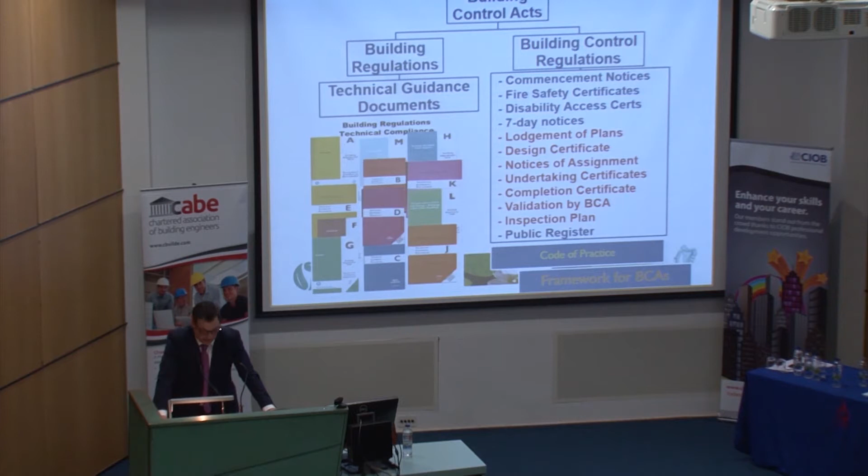Second speaker struck me in my job as a GMIT lecturer. I attend many seminars, presentations, CPD events, etc. during the year. For the past year, one of the worst I attended and also one of the very best I attended had the building regulations in common.

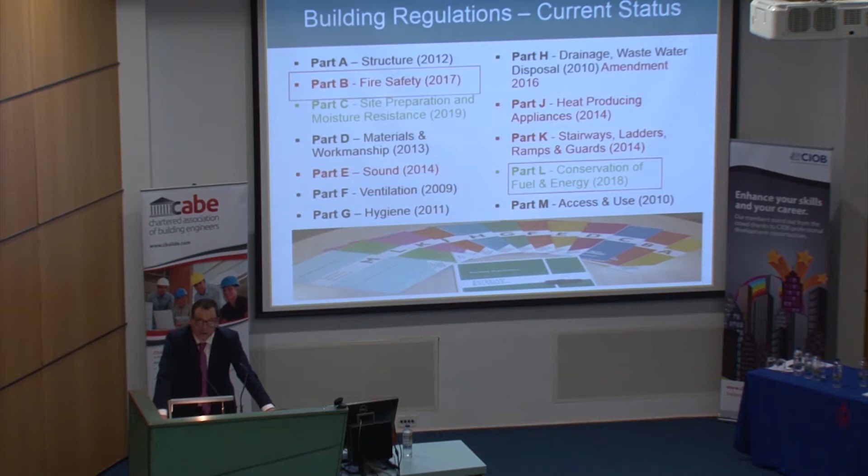So you'd be very pleased to know that the very best one was presented by Eamonn Smyth, who's our next speaker. Eamonn is advisor to the Department of Housing, Planning and Local Government in the area of building regulations, building standards and control. He's worked extensively over the years in the development of the technical guidance documents that we all use, and development of standards for both radon remediation and inspection protocol for legacy septic tank issues following the intervention by the European Court of Justice. Eamonn is a Galway man, St Jarlath's, and then on to NUIG, where he graduated as a civil engineer, and he'll update us today on recent and near future changes to the building regulations.

Back for some reason. Okay, good afternoon. I think we are just about afternoon. As you said, my name is Eamonn Smyth. I'm a civil engineer, work with building standards.

Today, I put up 'what next', because most people go, what next are they going to come up with for the building standards? And I'm going to do a very quick run through of what we're at and where we're going. Any of you that have heard me speak before know I can do an hour on any one of the building regulations, so to try and cover four different sections of it is going to be a pretty rapid overview.

So let's go. Building Control Act is where the power comes from. That gives the Minister the power to do the building control regulations and the building regulations. Building control regulations, as I said, you're all sick to death of them - BCAR, lodgement of plans, design certifiers and whatever. That's all in place. It's been in place since 2014 and it is having an effect, absolutely. People are now looking - whereas before they signed certs, now they're statutory certs - they're actually liable, and they're now being very cautious about what they sign.

Behind that, what's happening, we have the BCMS system, the Building Control Management System. And at the front end of that, we're now in the process where we're talking about innovative technology and whatever. We're working to be able to put both fire safety certs and DAC applications online in that system. Behind the system, we're introducing a risk analysis. So when you fill out the form and you say you're a multi-story building, or a timber frame multi-story building, or something else like that, it flags it up as a higher risk than other buildings, and then the inspections by the Building Control Authority will be done on a risk basis. That's where we're going with that.

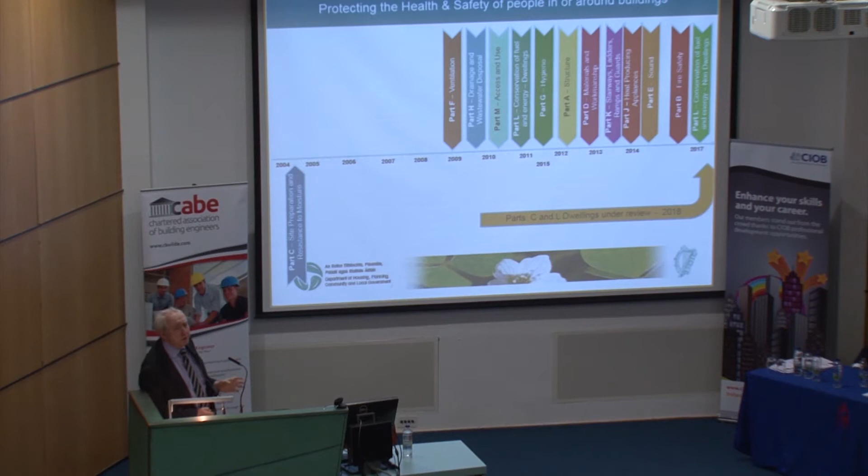The building control officers themselves will actually have handheld app systems where they can download any of the forms you've actually put in online when putting it in for validation. At your commencement notice stage, it will also be able to handle all of the plans and all of that. Oh, I must have been clicking on things.

Right, on the other side, we have the building regulations. That's really what I'm talking about today. One of the points I would make is that achieving all on the right-hand side under building control gets you no place. The whole purpose of them is so that the building regulations are complied with, to make a building safe for people in and about buildings. That's the aim, if you like. That's the mission of the building regulations - the health and safety of people in and about buildings. That's what they're there for.

There are controls in place so that we might achieve that. There was a delegation over from Norway recently, and when I asked them, do they have a robust system like that? No, they don't. Do they have a problem with compliance?

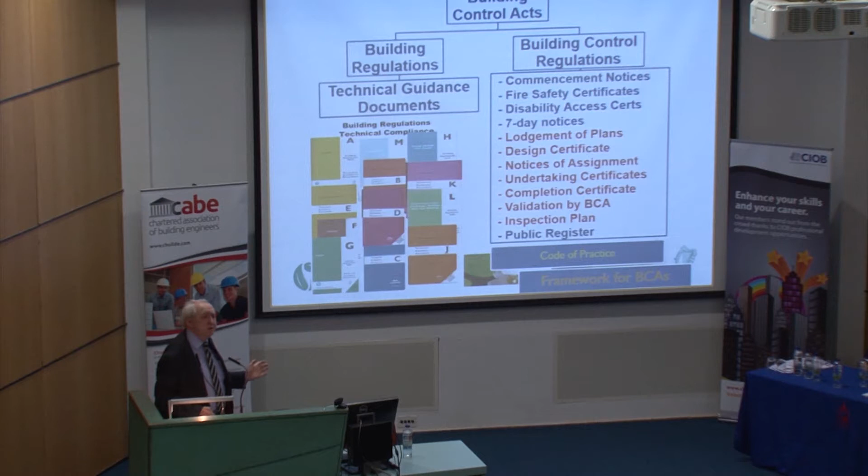No, they don't. When they introduce a regulation, the builders, designers and everything take it all on board. We haven't achieved that yet.

If you haven't been in the game since the downturn, you'll see we've done a hell of a lot of work, good or bad. You can decide on that yourselves. But basically, that's where we've gone with all of those.

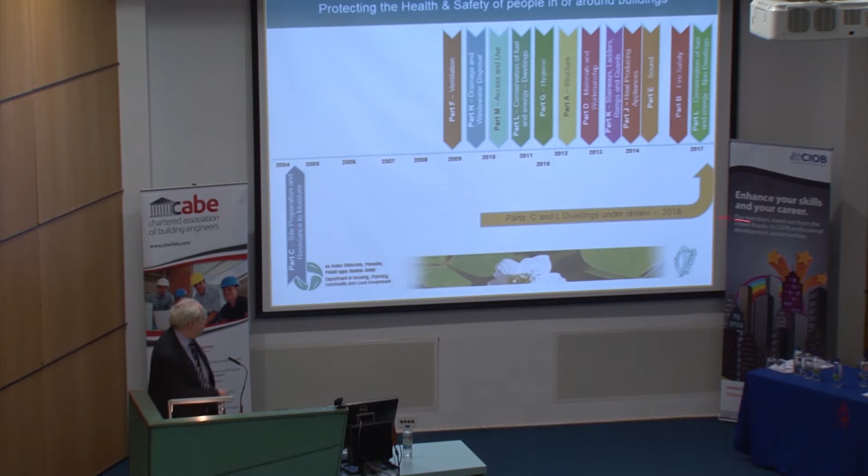Where we are, I don't know whether I can point with this thing. Poor old Part C is back there. We're trying to do it. I started it back in 2014 and got sidetracked into Fire and Part L, mainly Fire, and so we're still trying to work on Part C.

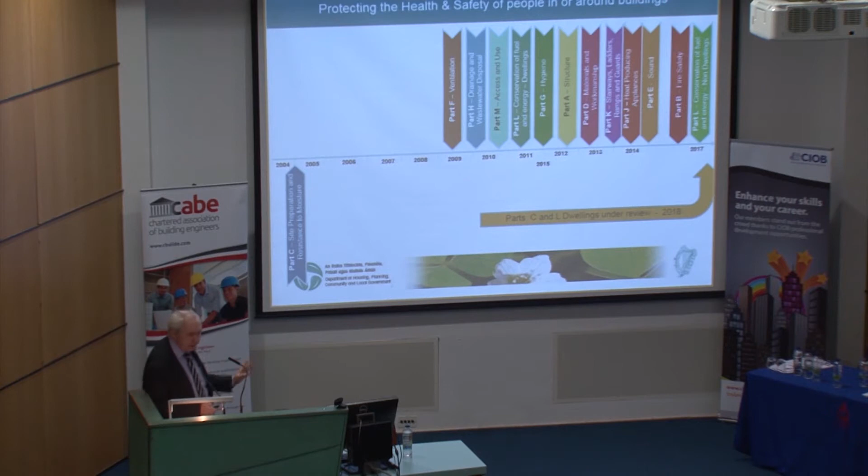From that point of view, we are starting work under the pyrite report and indeed the blocks report. It's recommended that Part C comes out. Part C SR21 for a hardcore was revised because of the issue we had with pyrite.

I keep pressing that by mistake. So what I'm going to talk about today is B and L. They're the ones on the cards that are being done substantially. And as I say, Part C, we have initiated some work on it.

We're looking at maps, wind maps, wind-driven rain, spell maps, highest and lowest temperatures affecting on steel and stuff like that.

The other bit is that Part C is becoming a very serious document because we're looking at renders as well, monocouche renders, single coat renders, external insulation. The whole ball game has changed. If you go back and look at the document right now, all you have is a mention of cavity walls. But now we have single leaf systems with external insulation.

My SEAI colleague mentioned it - they're doing it in retrofit, and also in new builds. But you have to have a situation where it's robust enough for the Donegal coast when the winds are lashing in off the sea.

This is where we're developing the wind maps and whether they're appropriate in certain areas, whether certain types of construction - on the other side of that, rain screen. You saw the issue in Grenfell, the rain screen went up like a candle. That's another issue we're looking at from the Part C point of view, and from the Part B point of view.

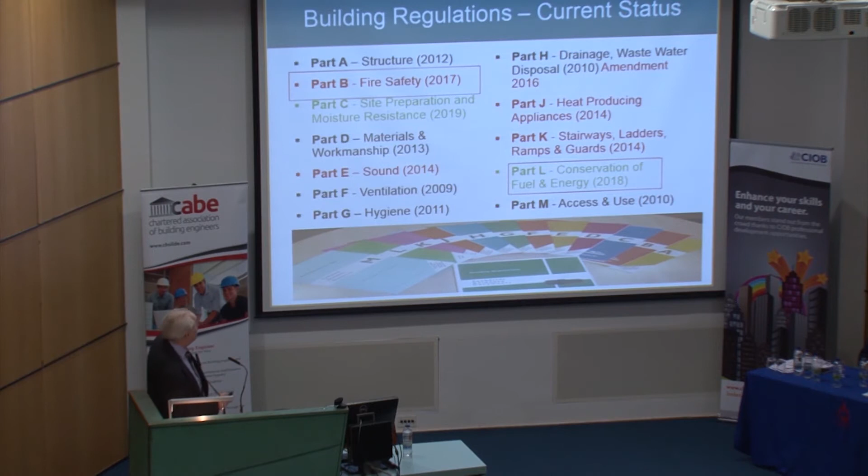Okay, so Part B. What? Oops, this is like a gun. So basically, Part B started in 2012.

We went out for what we call a pre-revision consultation. We got 44 submissions, actually over 1,000 comments. We also set up a working group of stakeholders to actually review the comments and come up with recommendations. What did they come up with?

They came up with the idea of having 2 volumes - one for dwelling houses, which made it more simple to understand how you complied and got safety in dwelling houses. It's interesting to know the statistics show that 80% of fatalities in fires are actually in dwelling houses. We're inclined to think of multi-story buildings, apartment blocks, but no - 80% happen in actually dwelling houses.

So the document Dwelling Houses, Volume 2 as we now call it, is specific for dwelling houses, and then the other one covers buildings other than dwelling houses. The dwelling houses document came out and was published in 2017, and is applicable from the 1st of July 2017. This is the legislation.

What did we do? Well, we changed just a tiny bit, and I'll explain that in a second. Normally when we do a regulation, we take out the previous legislation and drop in the new one in the second schedule of the building regulations 1997. We didn't do that this time because we wanted the legislation to stay in place for buildings other than dwelling houses. So we dropped in B6 to B11.

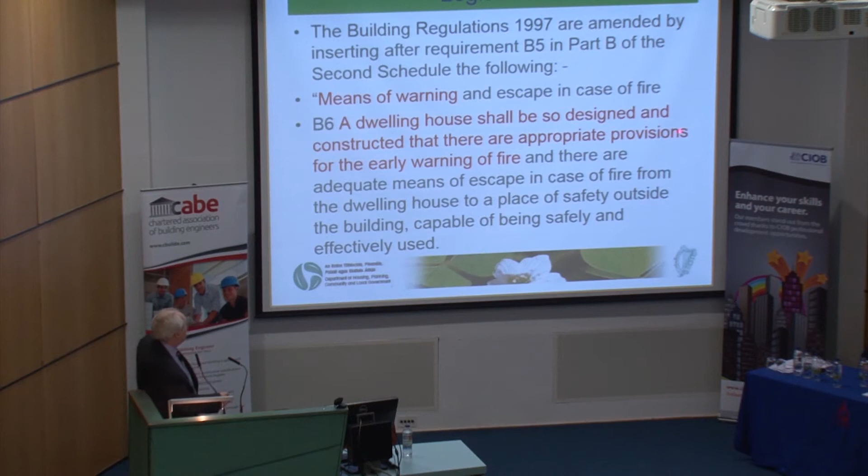I put that in specifically because there was a legal argument that you could say you've provided an adequate escape route, with the lads sitting on the stairs. We don't design for that - that's supposed to be a clear way so that in the event of fire everyone gets out and isn't tripping over you and your bags on the floor. That's the actual point. So by putting in that stairs, you could say, well, I've provided the escape route.

We wanted this, and there was an extrapolation within the TGD, but it wasn't in legislation. Now it is in legislation - you must have an escape.

The other thing is dwelling house - that was just a new definition. A dwelling house is a dwelling that is not a flat, because dwelling and flat are already defined in legislation.

The TGD, as I said, comes in on the 1st of July. All dwelling houses started after that date must comply with the regulations. There's no planning exemption. I had questions.

What about if I've started? If you've started the dwelling, then the building regulations that existed before the 1st of July apply. If you start the dwelling after the 1st of July, then the new regulations apply.

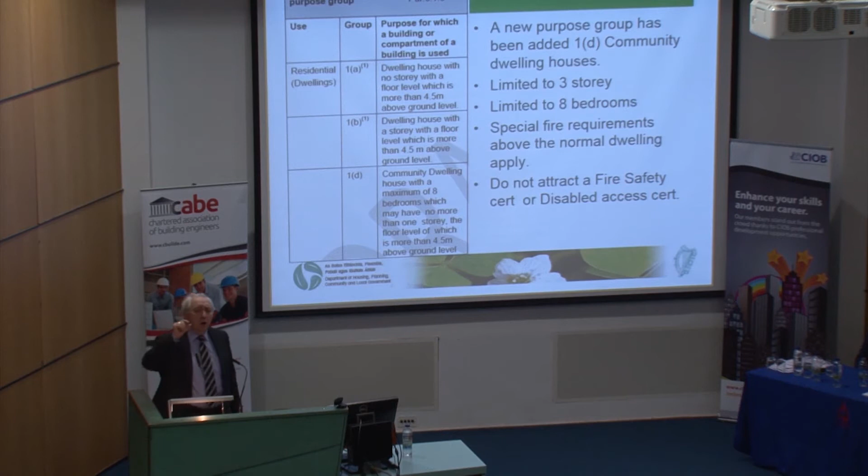Does that mean you could have different requirements on the same estate? Absolutely. You could have one side of the estate with alarms just in the living room, kitchen, and corridors, and in the rest of the houses you also had to have them in the bedrooms, because under a High Court decision in 2003, the building regulations that apply are those in force when the work started.

Okay? Did I jump one there? Okay.

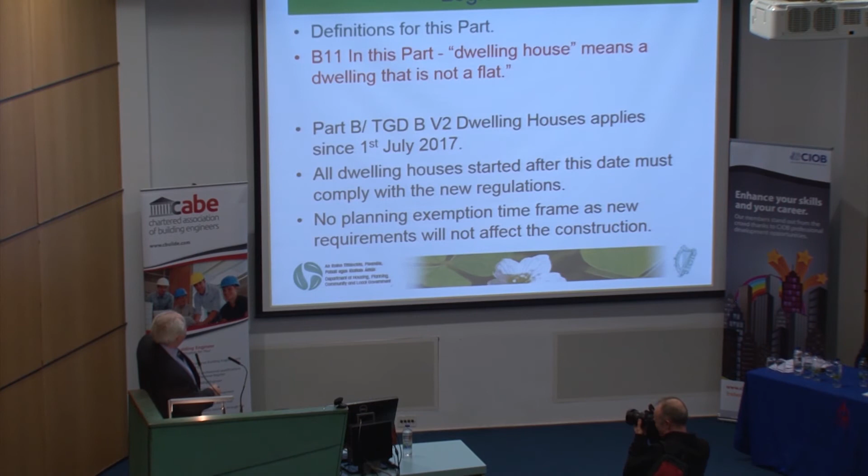So what are the changes in the TGD itself rather than in the legislation? Remember, the TGD provides prima facie compliance that you've complied with the legislation, but the legislation is what you technically and legally have to comply with.

The biggest change we've made is a new purpose group, 1D, which is community dwelling houses. We were asked to do this by the HSE and some charitable organisations, because under the strategy for decongregation of institutional buildings to communities, they were moving people out into community-style dwellings, but were obliged to meet the requirement of Purpose Group 2A, which was seen as excessive and was costing a fortune.

What we've designed is that you can move them out into what's known as a community dwelling, as long as you meet certain criteria. In that instance, we've reduced the standard, but there are assumptions in that - so we have a higher level than a dwelling, but lower than a Purpose Group 2A.

But it only applies in certain circumstances - only 3 storeys, only 8 bedrooms. And they don't attract a fire safety cert or a disabled access cert.

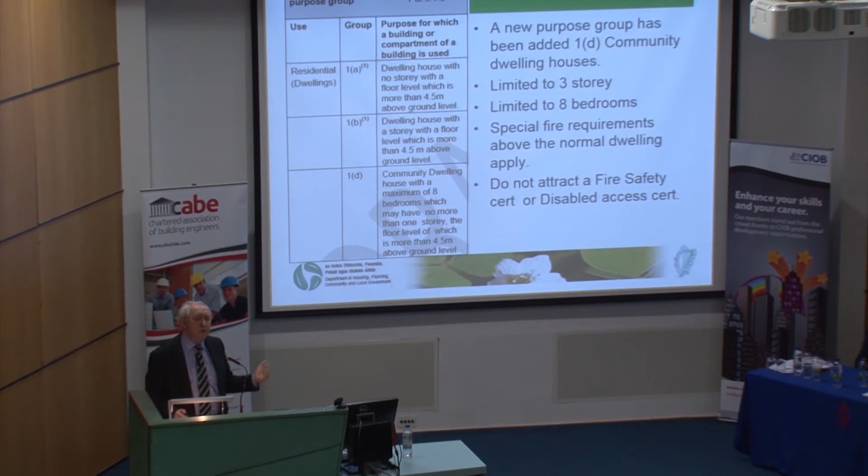There was a calculation done. If you take an existing house and change it to the community dwelling standard, it will cost about 40,000. To change it into a Purpose Group 2A, it will cost 140,000.

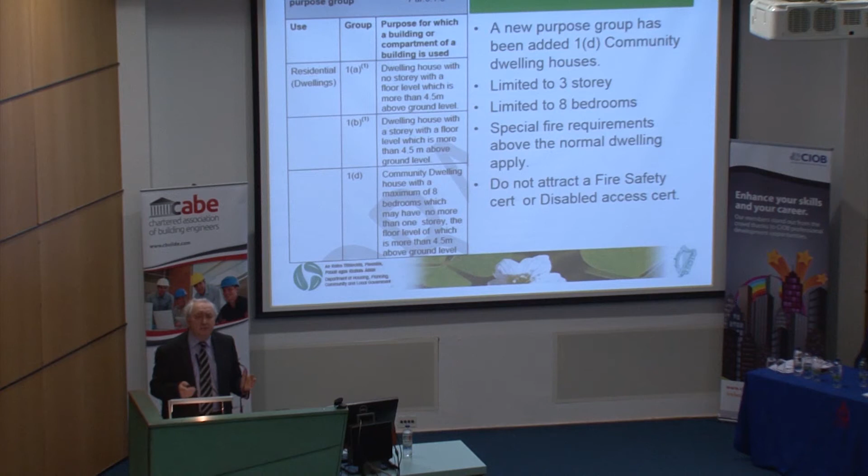My own personal view is that for charitable organisations, or any organisation building them - the HSE - if you're building new, I'd go for Purpose Group 2A so you can accommodate all categories of people with disabilities. If you're converting one, I'd go for a community dwelling and limit its uses.

So there's your community dwelling house - that's what you're defining it as.

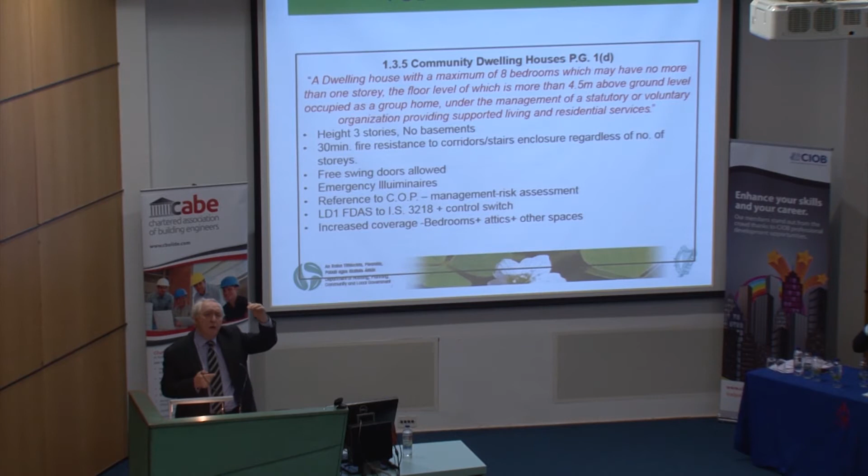What have we done? As I said, 3 storeys, 30-minute fire resistance to all, doesn't matter about the height. In a normal house, full half-hour fire resistance only occurs at 3 storeys - before that it's nominal half hour, full in a storey.

In these houses, it doesn't matter if it's a bungalow - we still want a full protected corridor so that you have time to escape because of the disabilities you may have. We're hopping all over the place.

Also, it's an LD1 system - an LD1 Fire Detection and Alarm System to IS 3218. It also has a control switch which tells you where you can silence the rest, and tells you where the actual fire will be. We have alarms in all the bedrooms and the other attic spaces. That's what an LD1 system gives you.

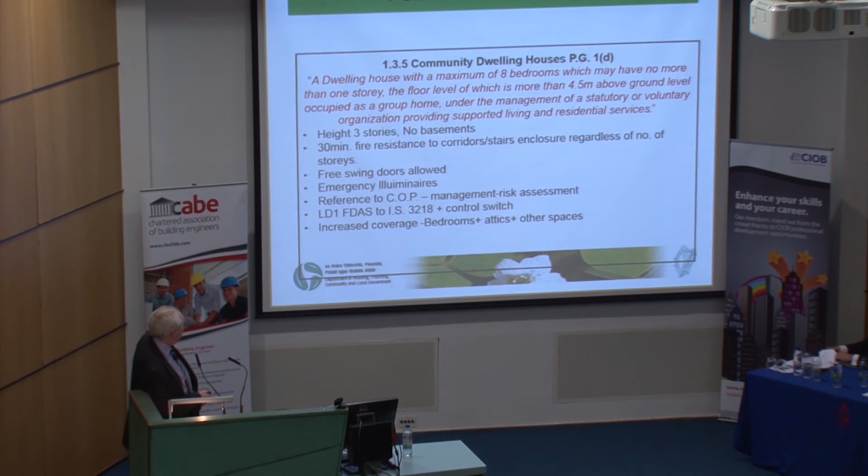We introduced, through the fire services, a Fire Safety in Community Dwelling Houses document - a colleague and myself wrote it for these.

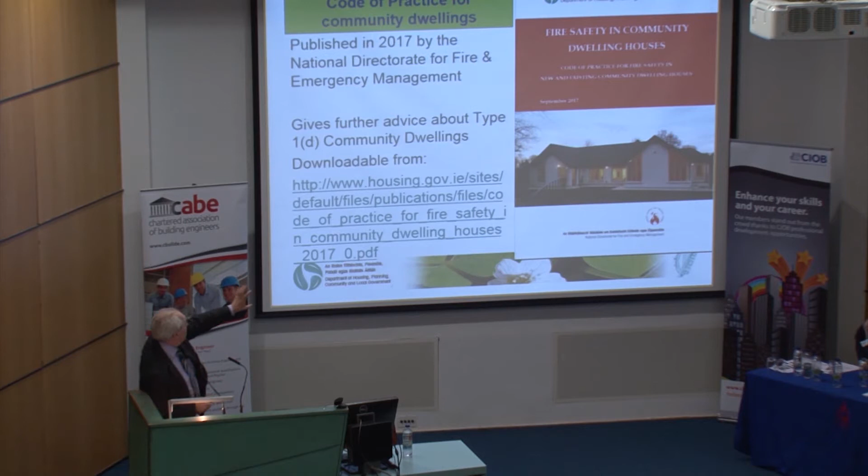This not just goes through the fabric elements which are in the TGD, but also the management element and the assessments that are required. That applies not just to new build, which building regulations would apply to, but also to houses that are now being used as community dwelling houses. That's an important document, you can download it from there as well.

Back to the main changes to the TGD. Main changes: fire detection alarm system, the LD2 system - I call it the Paddy LD2 system. I'm not particularly happy with it, because if any of you are across the border, you'll understand that an LD2 system in the UK is now different to an LD2 system in Ireland.

It would have been nicer if they put it as an advanced LD2 system. Our LD2 system requires you not only to have it in all the areas we previously had, but it also requires you to have it in all the bedrooms, as well as all the other risk areas. That's our LD2 system - you need to be careful. You have contractors that come across from the border working in the south, and they say you have to do it to an LD2 system, and they do it to the UK LD2 system, which is non-compliant. In that sense, I don't like it.

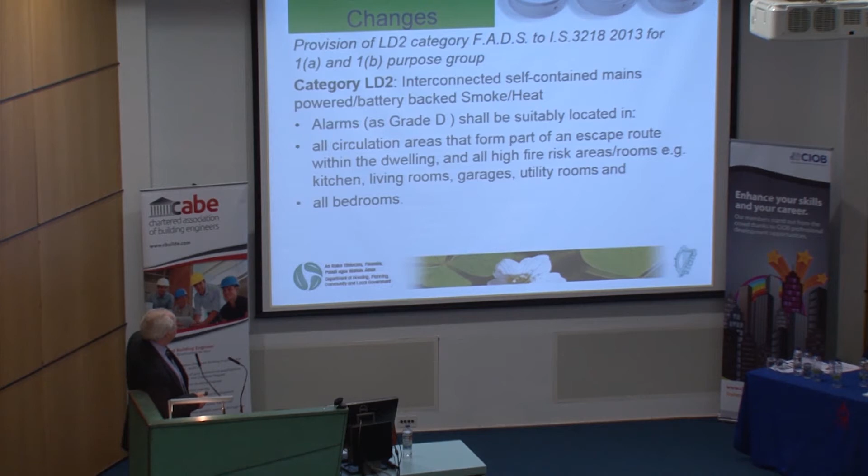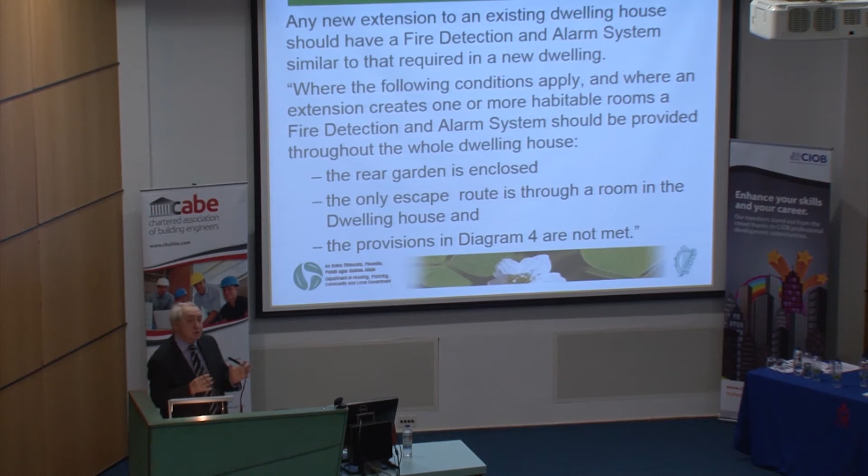Also, new extensions - if you're doing a new extension, you put in an alarm system. But there's also a scenario where you may have to put it in the existing house. Normally, the building regulations do not require, except for change of use, works in an existing building unless you're doing a material alteration, and then it's only to the works you are doing. In this scenario, if you're caught - I'll show it to you for a second, here. So you put on an extension at the back, and you have an enclosed garden out the back, which would happen a lot in cities where the garage was developed beside it, and you have no way out on the side, and you're surrounded on both sides and at the back with another housing estate.

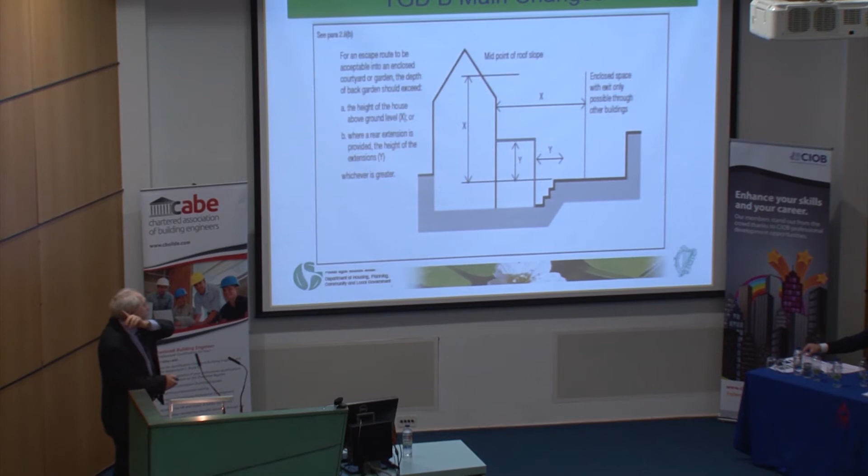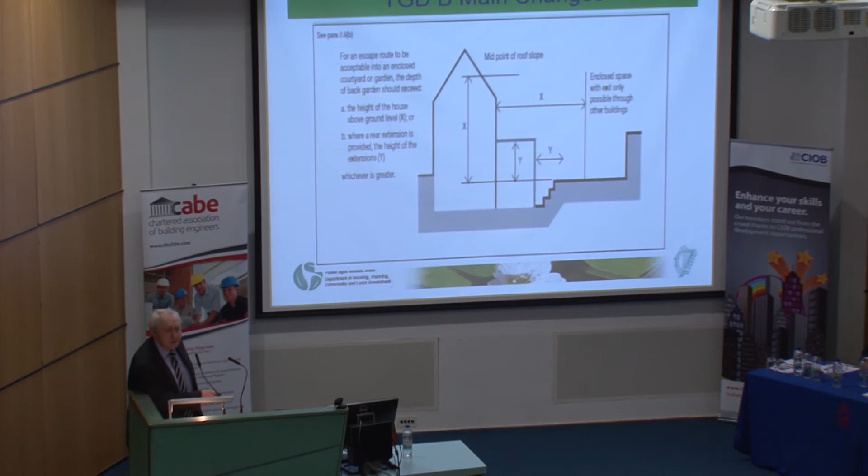Other change: in the current 2006 document, we say when you're replacing windows, it is recommended. We've changed that now for dwellings. If you're putting new windows in a dwelling, you should meet, as far as is practical. We've put that in because we're not asking you to break bigger holes in the wall than exist, but you should try to meet the actual escape requirements. In a normal house, in anything built in the last 50 years, you will be able to meet the fire requirements for an alternative means of escape. In the case of all other rooms, you shouldn't make it any worse.

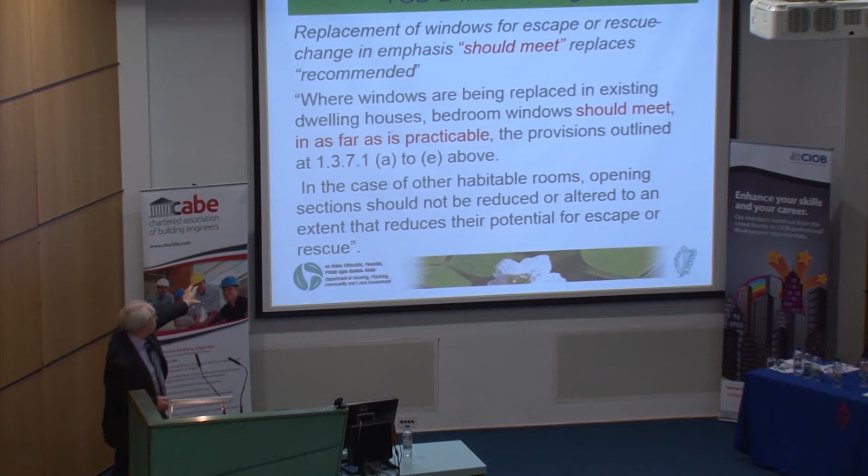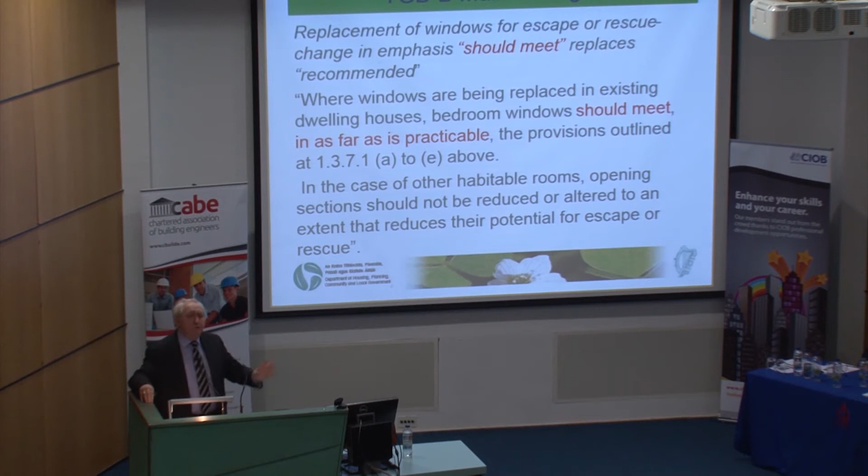That's always a rule in the building regulations - it says you can do no new or greater conflict to the building regulations. So if you have a building that doesn't comply, you can't make it worse. If it does comply, you can't then create a non-compliance by works you do. That's there in the Primary Act - you can't do that.

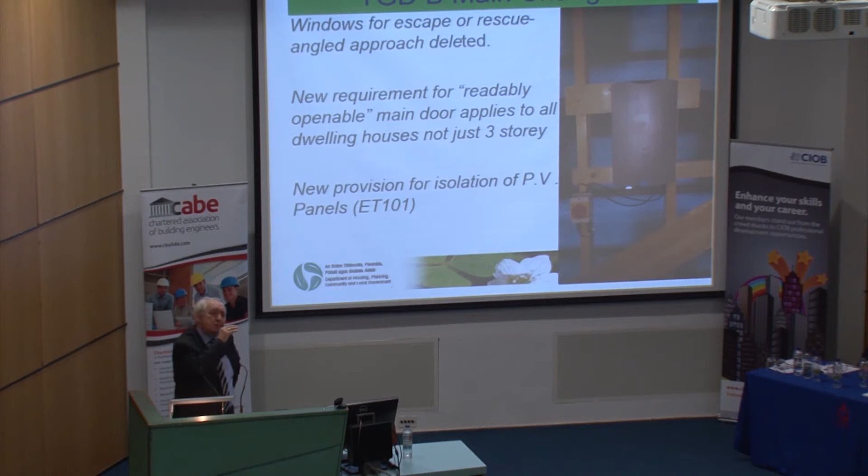Readily openable - I had a question here, actually came in from some building control during the week, yesterday actually. The readily openable requirement applies to the primary route. The primary route for escape is up there and out there. In a house, it's along the corridor. If you're in a bungalow, it's along the corridor and out the front door. If you're in a 2-story or 3-story, it's down the stairs and out the front door. So that door must be readily openable now.

It used to always apply in a 3-story building anyway because you had a protected corridor. It wasn't much sense to have a protected corridor and getting down to the bottom and discovering that the keys are where the fire is. You must have a readily openable lock. Now it's applying to all dwellings - readily openable primary. You don't have to have it on the patio door or on the back door.

That was the question I was asked. No, it doesn't apply to them, except if you had a patio door acting as an escape route for an inner room scenario, or in a 2-story house where the patio led out onto your balcony where you were looking over the River Corrib, for example, and that was acting as your alternative means of escape - then you'd actually have to have that readily openable as well.

But otherwise, no. The other thing is we require PV provisions on isolation of the PV - that's the PV arrays. That's the big thing at the moment for renewables, is PV. That's fine, but in the event of fire, you have to have a situation that isolates the actual DC side.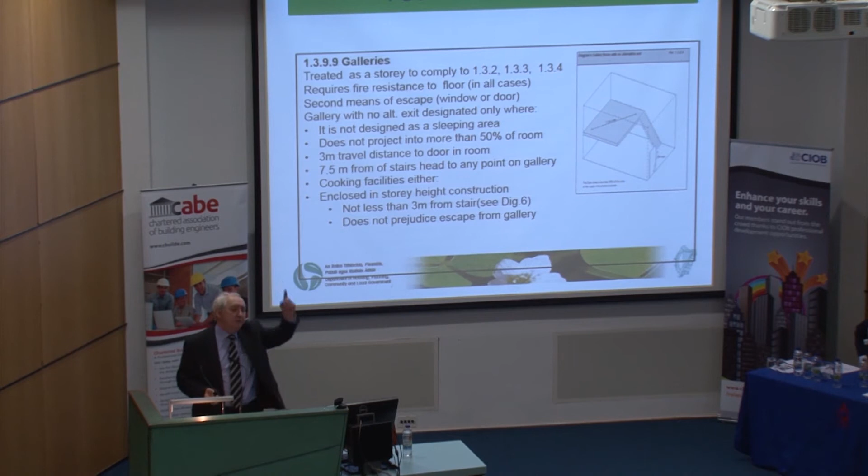So imagine you have a fire, fireman goes in. Their automatic thing is they pull the main fuse on the outside, the AC side, and that kills everything inside, so he's feeling very safe - except your inverter is down in the utility, and it's got a 20-foot line above in the attic that's all still live from your PV on the roof. When he pulls at the ceiling to try and pull the fire, he connects that and gives himself a very, shall we say, sparkle in his eyes, to say the least. You're talking about maybe 800 volts you'll actually get off that.

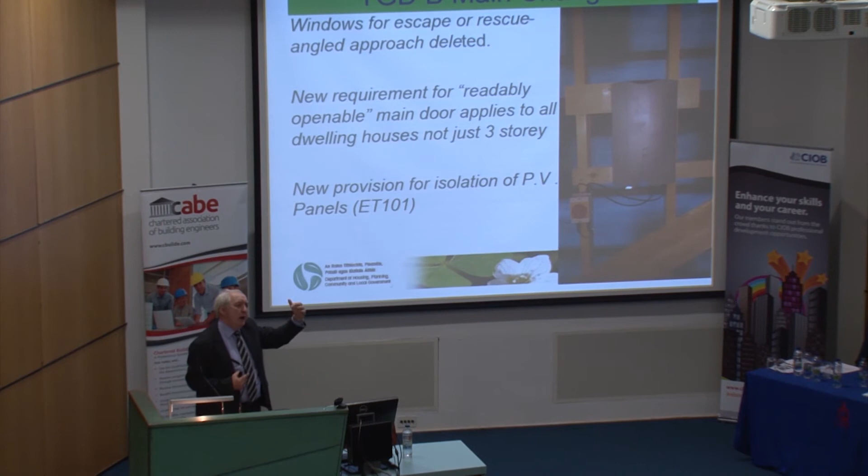So it is smarting a lad up, to say the least. So there are other ways of complying with this - we've come up with what one might call a more practical solution. There's a fire safety switch you can use, so that when he pulls the fuse outside, it has a 15-second delay but automatically kills it as it comes in. So you'll be bringing your PV array line, your DC line, in through the fireman switch and then down to your inverter.

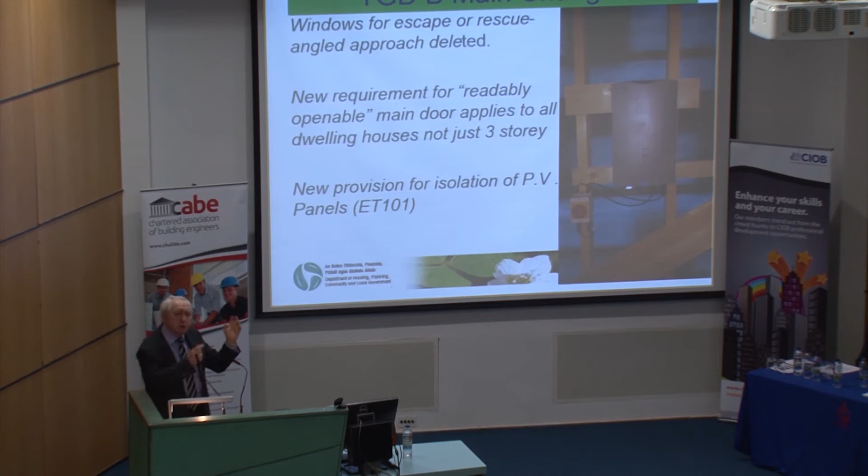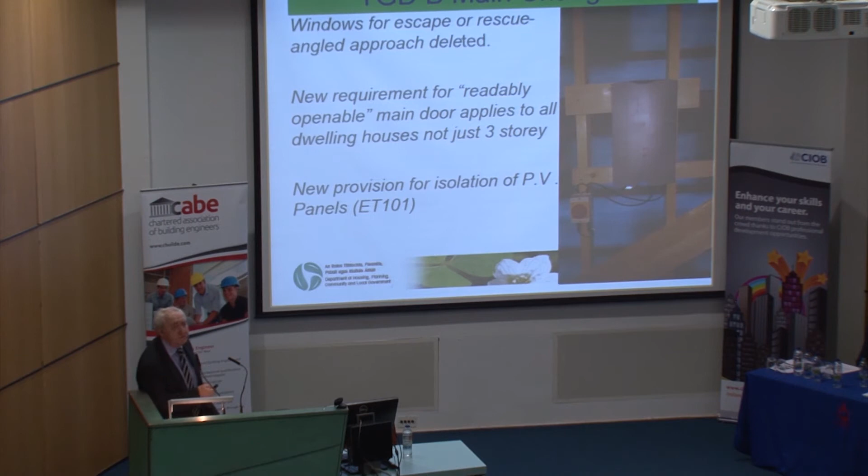The other option is put the inverter up where it should be and leave less than a meter from there in. That's a picture there. We had some consultation with some consultants, and they made up a mock-up out in a house I went to in Dublin, and you can do it that way - so when you bring the PV array into the building, you shorten the length of what is going to be DC live. So when you pull the fuse outside, it kills it as far as the inverter, and therefore you only have a very short piece of wire, so it doesn't present the risk it should. So you've eliminated the risk.

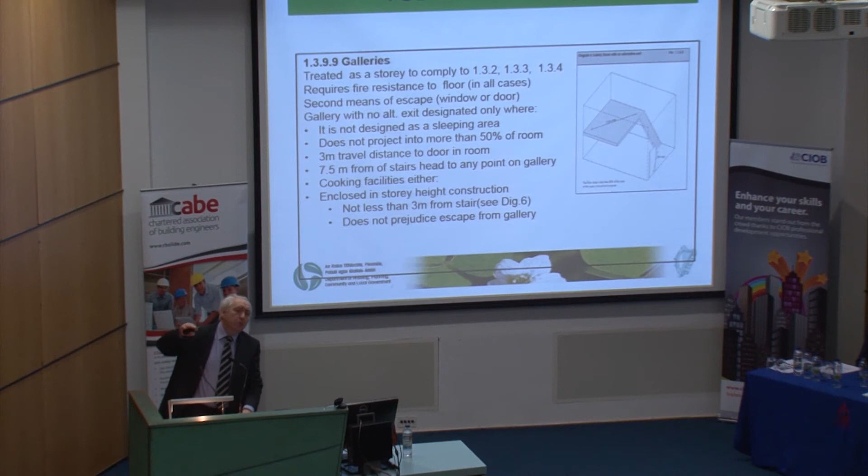Other thing that we have is galleries. A gallery is another story, just to be clear. A gallery is another story in which you must comply with the requirements of 132, 133, or 134 - so that's 1 story, or 2 story, 3 story, or whatever.

Except where - this is the exception, but it's the exception as long as you meet these requirements: not greater than 50% of the room, 3 meters from the stairs out to the door, 7.5 meters across there, and it can't be a sleeping area. So you can sit up there and have your drinks and tut at the world, or look over the lovely vista across the River Corrib, but you can't be sleeping up there - be comatose after a few drinks. You can't do that, because then you won't know to get out, and you'll have the fire underneath, and we'll have another fatality.

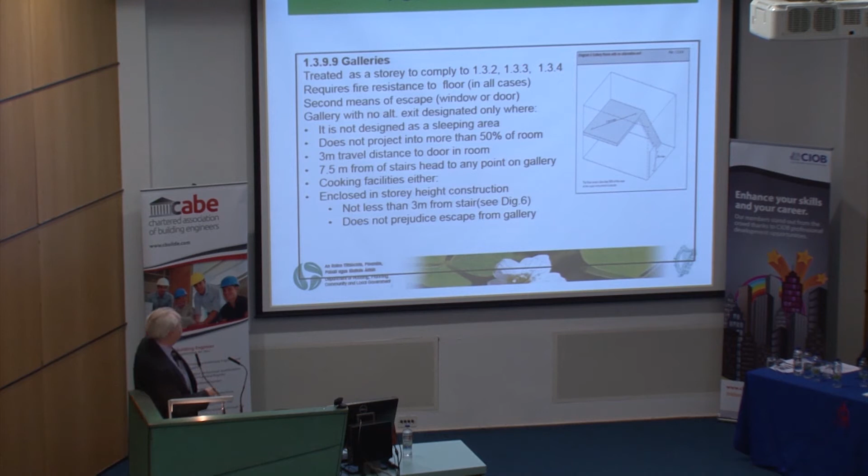So in this case, you must have - we're now requiring this, and you saw it in the external insulation as well, that's also a requirement of the external insulation. There, you must have a cavity barrier that comes from your party wall. You come across, it must extend out to the inner face of the outer leaf, whatever that outer leaf is made of.

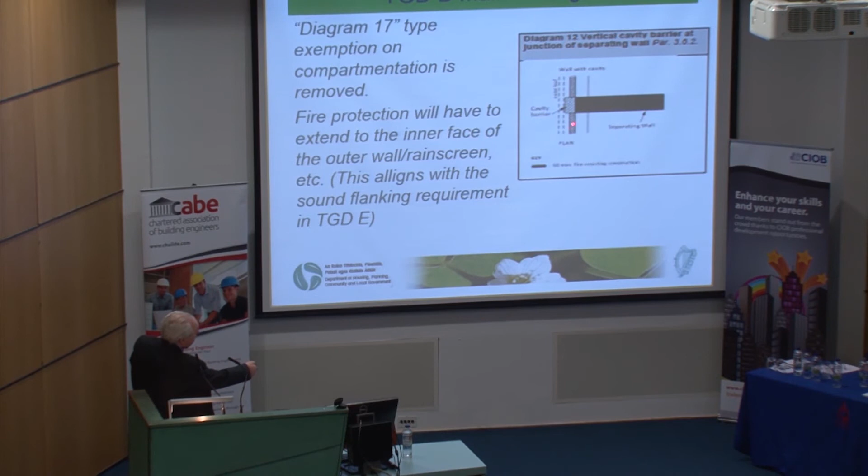And you'll see where it breaks, so that's non-combustible or limited combustibility. That could be any insulation - expanded polystyrene, carbon-enhanced expanded polystyrene, polyisocyanurate, or PIR as it's known - but then you must break it there, come back. So it must break it there in order to make sure of that.

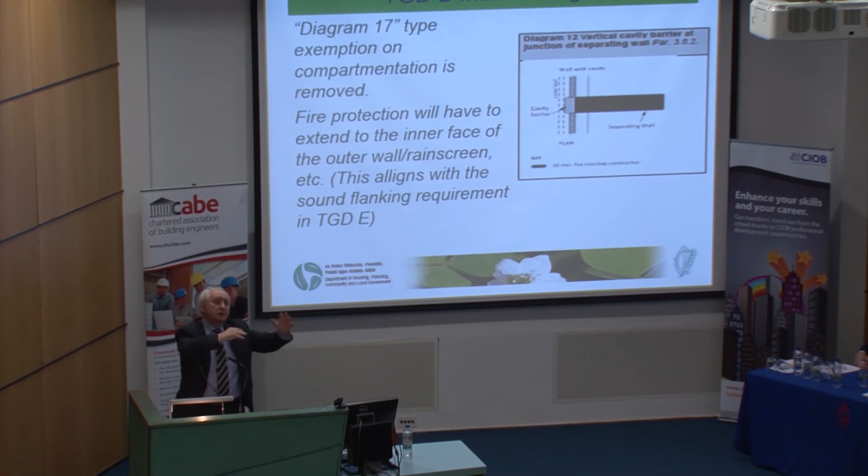You also need cavity barriers, of course, now at the top of the walls. Historically, you always did, by the way. But we got it there because everybody put a block on the top. Now we've taken away the block because of the psi value that it creates at the interface between the ceiling and the wall, and you get cold bridging at that point, so we've taken it away. But you need a cavity barrier. Otherwise, anything that gets in the cavity goes shooting straight up and the roof's on fire, and you're sitting down inside having a cup of tea while the roof's on fire.

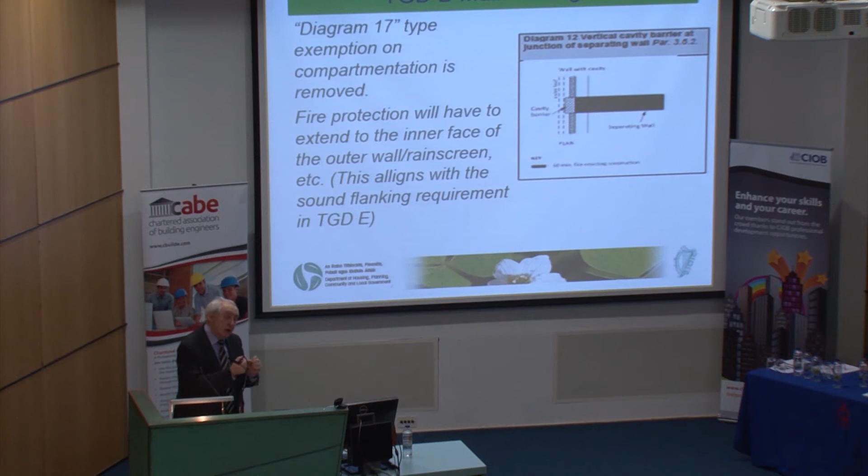That actually happened in a Swords case. It was a timber frame where a guy went torching. He was fixing a minor leak on a flat roof section on a timber frame building, and he caught the actual felt inside. It shot through the cavity and up, bypassed all the cavity barriers in this.

It was an 11-house block, and it went straight up. So inside in the house you didn't know anything was happening at all, but the whole roof was on fire, and all the cavity and the structure that was actually supporting the roof was also on fire from the inside, from inside the cavity. These are the cavity barriers. That applies now to all houses, to all dwelling houses.

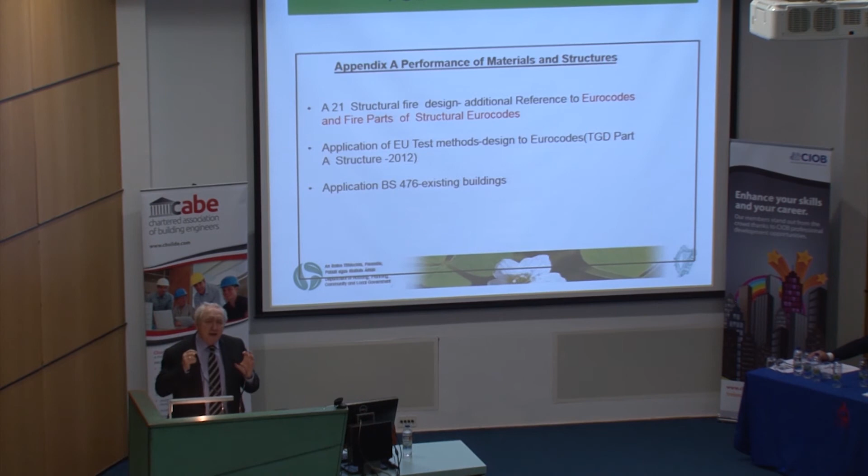Okay, last one on Part B, and the only reason I put this in is Eurocodes and the fire parts of the Eurocodes. The Eurocodes came in 2010, and they were mandated in the Technical Guidance Document A in 2012. The Eurocodes assume a fire protection of the structures, and when it assumes that fire protection, the performance is based on the European test method, not BS 476. It's EN 1365, 1364, and 1366.

These are the Eurocode methods, and you'll notice that the thickness of slabs will have increased in a lot of cases. I've been having great fun burning stuff over in England, but it was legal - it was in Warrington in the test lab - and we've discovered, quite shockingly, that a lot of the stuff isn't making the requirements. So I issued guidance, by the way, 3-4 weeks ago on timber frame walls and separating party walls.

And by the end of this month or beginning of April, I intend to issue another guidance on web joists. Web joists have become very common in use, because you can get your heat recovery ventilation system in through them due to the weaving of the actual metal web. But they don't have the same fire performance as a solid joist. So I'll be issuing guidance on both the fire resistance underneath and also any penetrations in them.

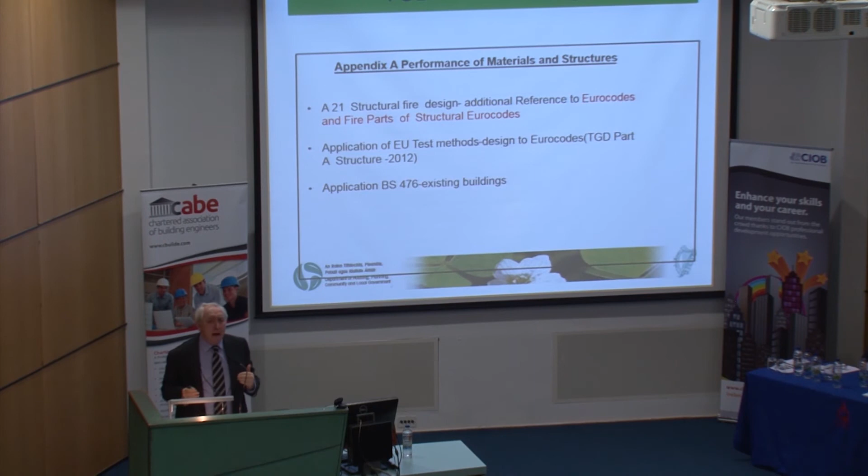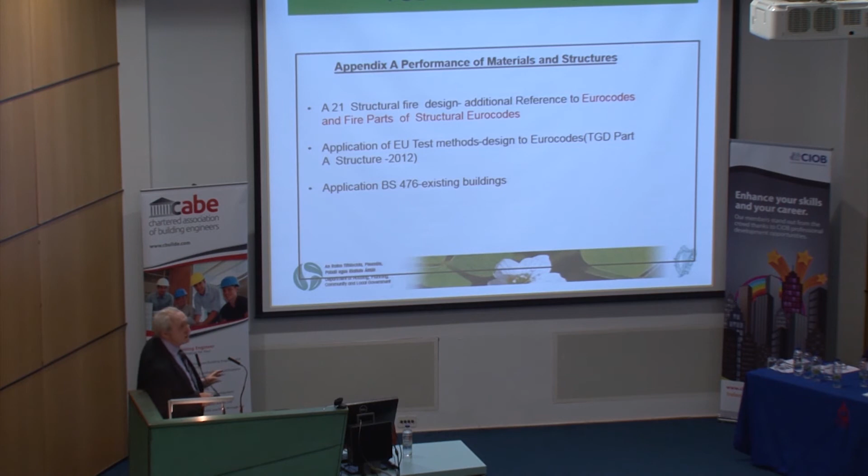Same thing with regard to trusses. Trusses where you need a fire resistance - for example, in a 3-story building, or in a 2-story with an attic conversion - that has to be a full half-hour fire resistance. We were testing over in England 2 weeks ago, testing a truss in the proper manner. We're not very happy with some of the testing that has gone on. We've developed - you need to be very, very careful. But I hope to issue further guidance on that in the next 3 to 4 weeks. That's why I mentioned that.

Any of the tests you're talking about, it should be to the European test method.

Okay, where are we? That's volume 2, as we call it, dwelling houses. We're at this stage now with Technical Guidance Document 2006. We're going on with the revision of that for buildings other than dwelling houses, and what's happening there is we're hoping to get it out to public consultation by the end of this year, some stage late in the year. It always goes for 3 months public consultation because that's a standstill period in Europe anyway - we must inform Europe every time we bring in a building regulation. And then we'll finalise it next year.

And there will be potentially a longer transitional period for that, because imagine that you've developed, or you have a Terminal 3 in Dublin Airport ready to go, and then we bring in something new - so there will be a transitional period on that. But obviously, that document is, to be honest with you, I'm not very happy with where we were with it, and so we're probably changing a substantial amount of it right this minute. And of course, it's also influenced by the Grenfell disaster.

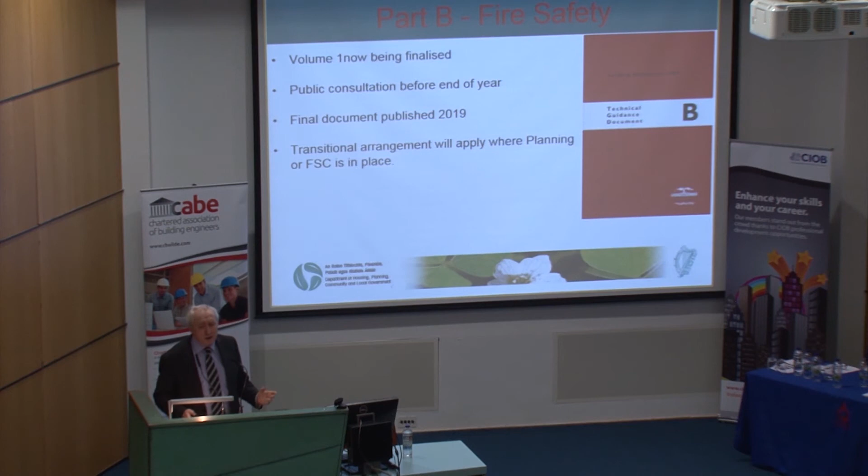Just we're looking at that and looking at what the reports say on that as well. So that's where we are with Technical Guidance Document B.

The other one I've been asked to talk about is near zero energy buildings. This is what everything's driven by, the Energy Performance of Buildings Directive. Just about everything energy - a colleague in SEAI, whose name I can't remember, apologies for that.

I never can remember anyone's names. But that's what's been driving more or less everything we've done in the last few years with regard to energy. So it says basically member states should ensure that all new buildings are nearly zero energy buildings by 31st December 2020.

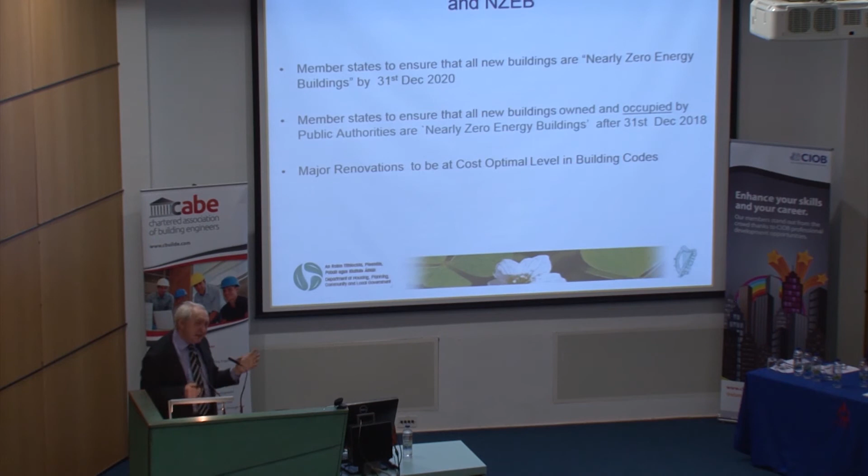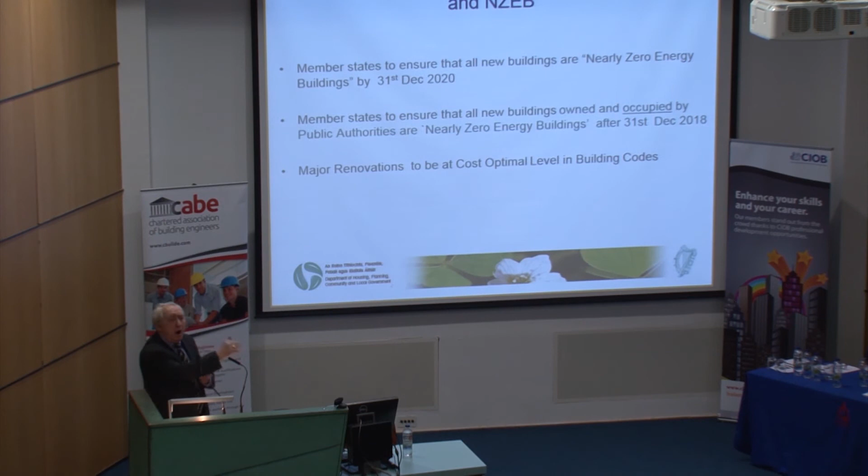And that's a strange one, because the way they actually say it is that buildings should be on completion - now we always say buildings starting from a date, that's not the way Europe did it. They said being occupied by 2020, which kind of leaves a kind of strange one.

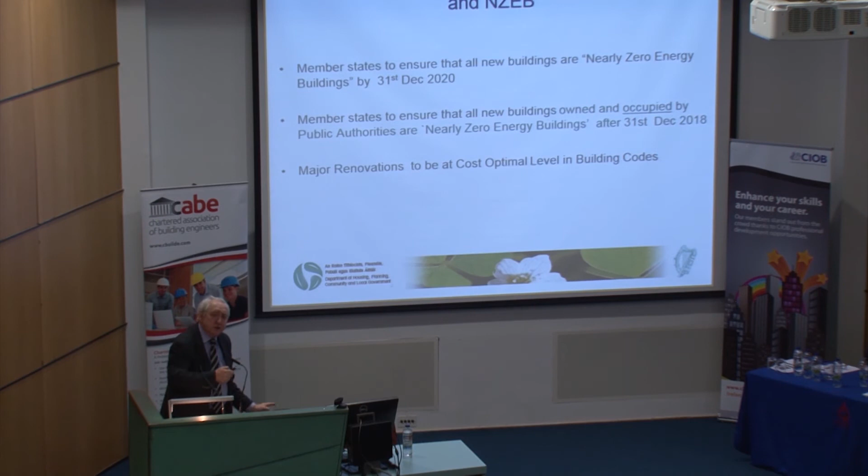And actually AECOM, who we're talking to here this morning, they did the cost optimal analysis for us under contract. So that's it, very low.

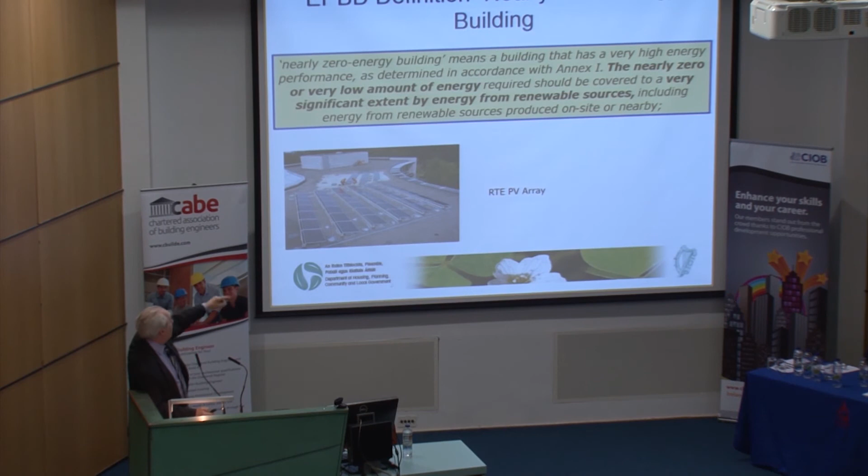So basically, and again back to the colleague in SEAI, exactly that - we've always said first you reduce your energy requirement, and then you get the best, most efficient way of providing the bit of energy you do need. And they're saying some of that has to be from renewables, preferably on-site or near-site. There's the RTE PV array there.

So for major renovations, 25% of the surface of the building envelope undergoes renovation. Just to be clear, when you talk about that, that's the thermal envelope - so that's not just the walls, it's also the ceiling and the floor. It's 25%, not just the walls. So if you're doing windows alone, that's not going to make up your 25% and it doesn't kick you into something else. But we're looking at that at the moment.

The other thing is a minimum energy performance is technically, functionally and economically feasible. If there was ever an out, that's it, but we have to work out what that exactly means as well.

And we are under an infringement from Europe. They don't seem to like us in Europe - they seem to love to fire an infringement against us any time if we don't move fast enough. Martin mentioned I was involved in the infringement and the court case on wastewater treatments.

With the wastewater one back in the day, they fined us 2.7 million and 12,000 a day for every day we weren't in compliance. And they have the potential to do the same - they can do that when they take an infringement against us. So we have to act fairly promptly when we do get an infringement against us.

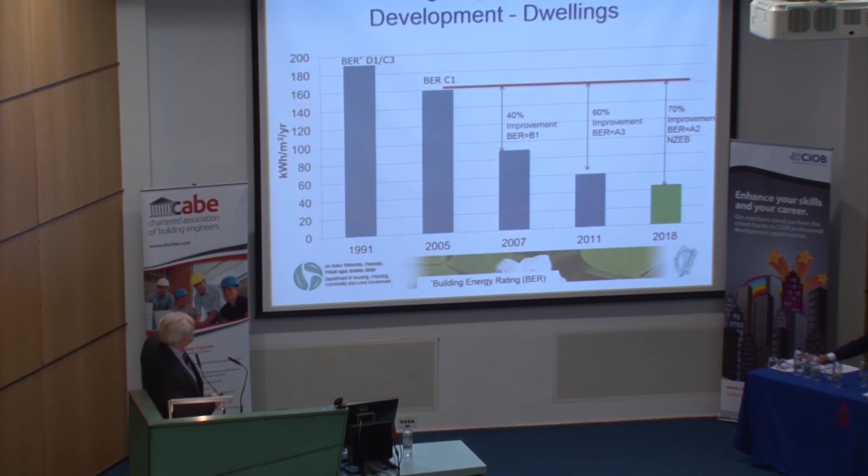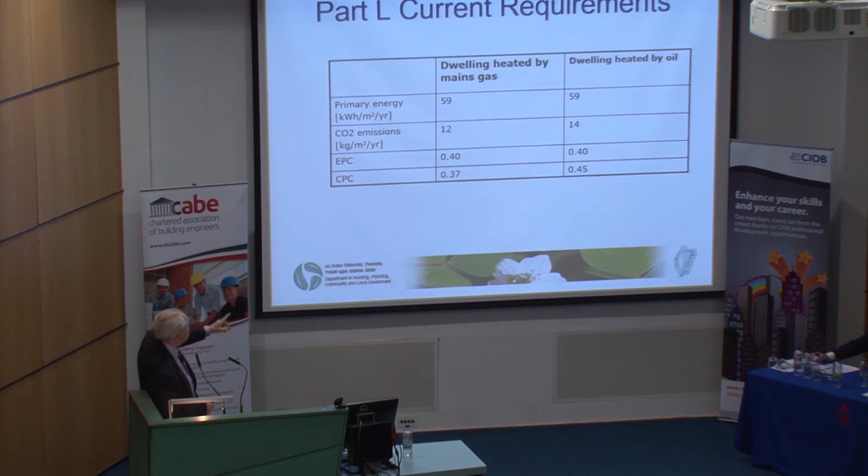I remember Part L now, that's what we require - an EPC of 0.4 and a CPC of 0.45. Current regs, that still stays. So what are we doing? Again, Europe didn't like the fact that we hadn't told people, so we had to do an emergency amendment, SI4 amendment to the technical guidance document, just to tell you where you were going.

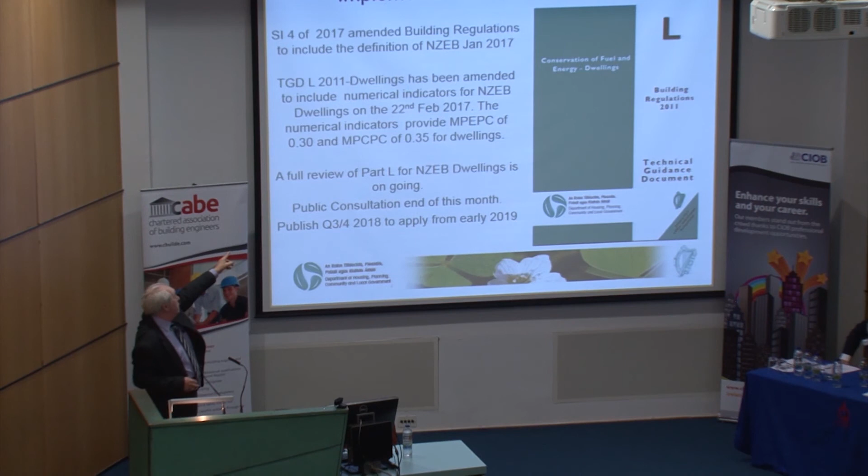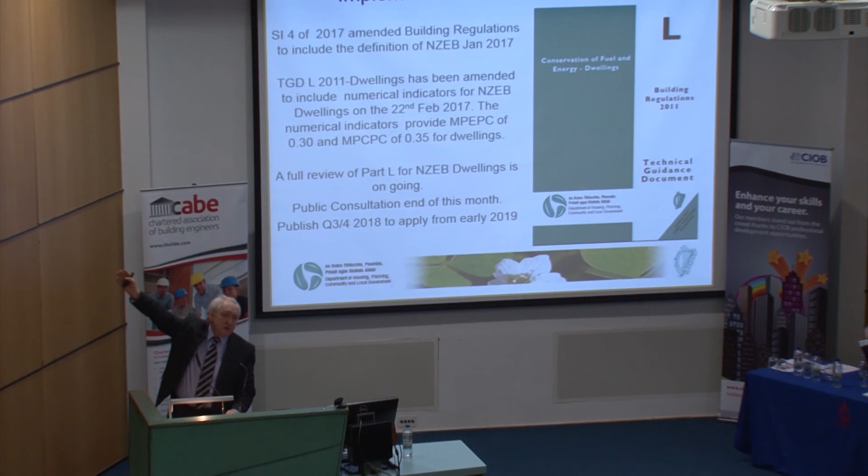Back in 2017, we set out that near zero in Ireland will mean an EPC of 0.3 and a CPC of 0.35. We said that back then to tell you where we're going, but it doesn't apply yet. We just had to tell designers out there building or designing houses for 2020 what they should be designing to.

A full review of the dwellings is actually ongoing. We're going through public consultation - my colleague Sean is working feverishly with colleagues in SEAI to develop the Part L document. It'll be 2018. It's going to public consultation by the end of this month, and we hope to have it finalised potentially in September. It depends on the comments and on the Minister, who has the final say in most of these. But as we are under infringement, we will be pushing to get this out.

Then it'll apply in early 2019, maybe applicable from April or June or something like that. So that's where we're going with dwellings, but we already know where we're going in real terms. It's a question of how do we achieve it.

So it'll be advanced fabric performance, improved air tightness, calculating the thermal bridging, renewables, and review of ventilation provisions. The fabric, as stated in Annex E of Technical Guidance Document L right now, probably won't change much. The default backstop values will probably come down from 0.21 to 0.18 for a wall.

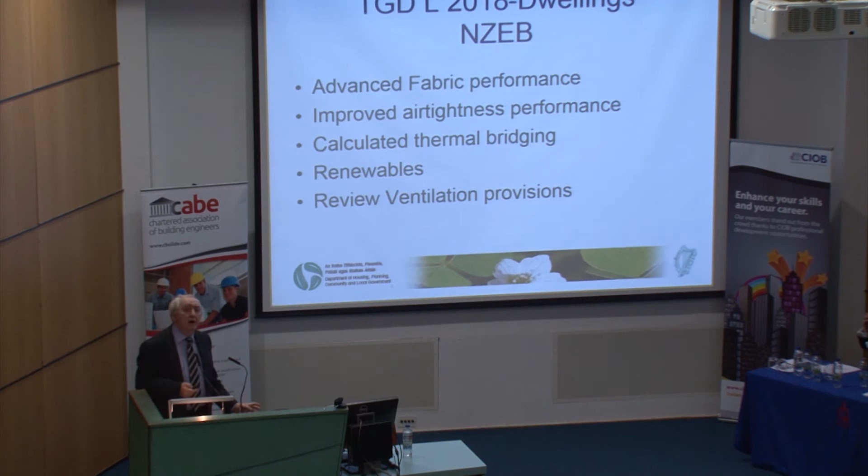Major renovations - this is one we're still teasing out. What it says is 25% of the surface of the building envelope: if you do that, you end up having to do other works to a cost optimal level. As I said, AECOM did some calculations on cost optimal, and they're coming up with various different houses at cost optimal in the order of a B3. We're not clear where that brings us - if you take the G houses and you're doing some work, it will trigger you into doing something else. That looks like what's going to happen.

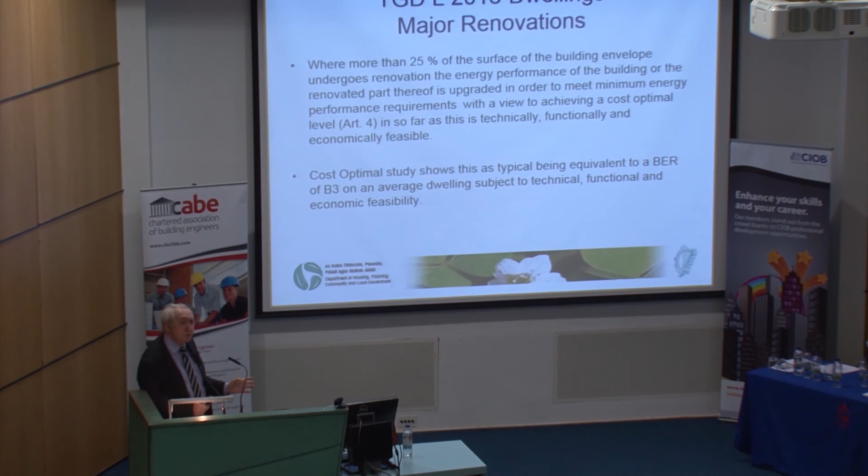What that actually means, we're still teasing out. That will come out in the public consultation later this month and in the final document later this year. But that could be potentially onerous - it's not clear, but it could force you into doing works you hadn't intended. In a lot of cases, it may only force you into doing a new boiler and stuff like that. We don't fully know.

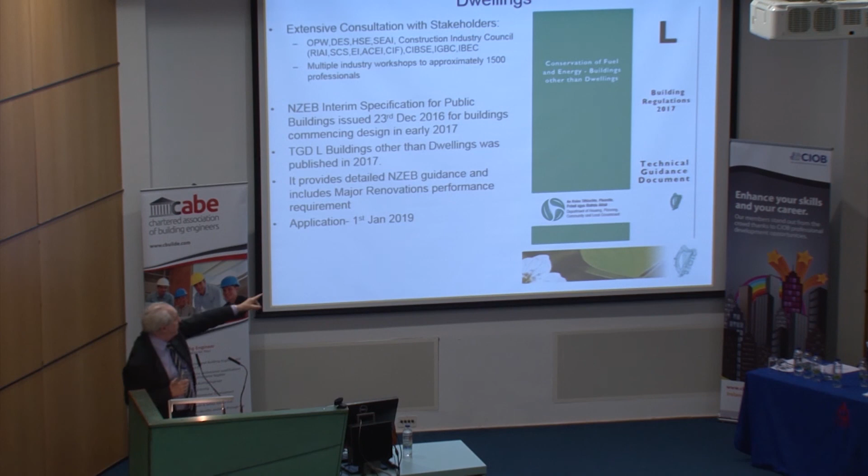Part L, other than dwelling houses - this is out. We had extensive consultation with the stakeholders. We gave hints at what NZEB would be for public buildings back in 2016; we had to do that. Then TGD L buildings other than dwellings - that's already published, downloadable from our website, and it comes into force next January. No choice - comes into force next January. What does it mean? Where have we gone?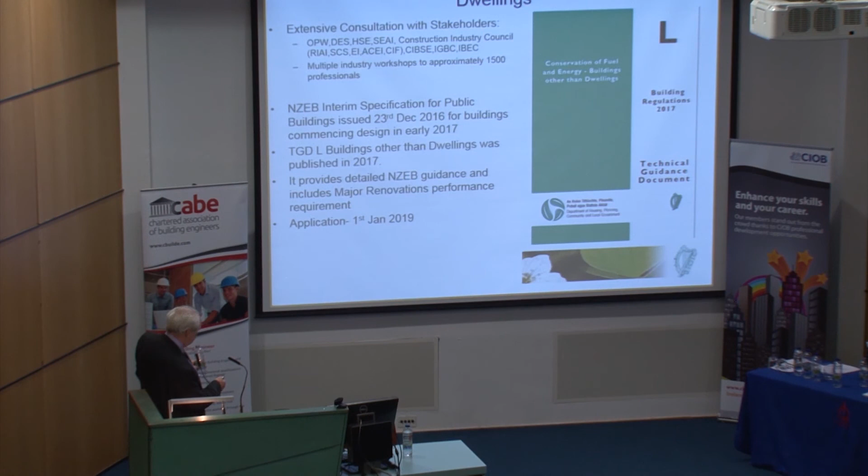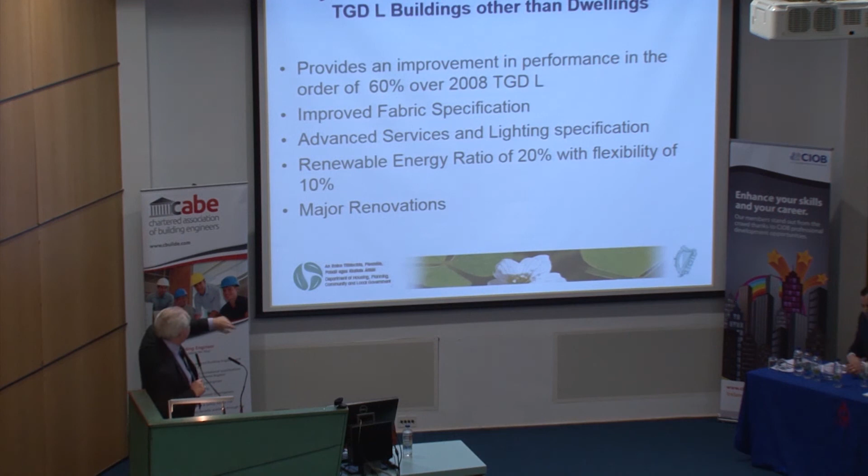Whereas before we based it on dwellings on the 2005 house, and said you're reducing it. In Part L, we didn't get to actually renew it, so we've jumped in. So what's in Part L is in fact your compliant near zero building for non-dwellings. What you'll end up with is an EPC of 1 - in other words, you equal what's in the document. That equates to a 60% improvement on the 2008 document: improved fabric specification, advanced services, and renewables.

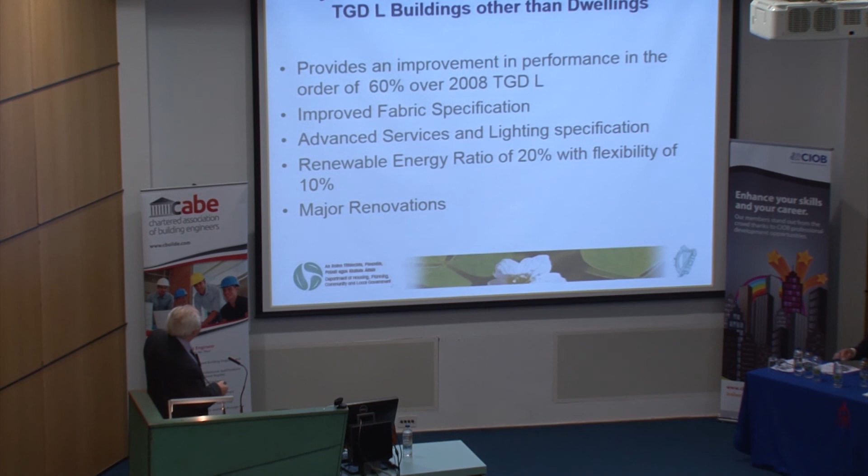There'll be a requirement for renewables of 20% of the energy required. But if you go below the parameters specified in Appendix C, you can potentially reduce your renewables to 10%.

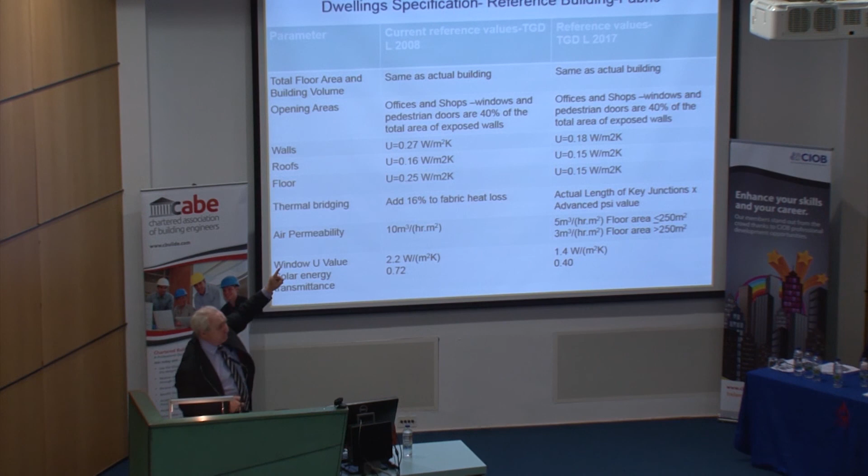So there's a comparison, just very quickly. Right now on the 2008 regulations, your walls must have a U value not higher than 0.27. That's changing to 0.18. Now that's not the backstop - the backstop will be 0.21, but to actually achieve an EPC of 1, it'll need to be 0.18 or better. Roofs down to 0.15 and floors 0.15.

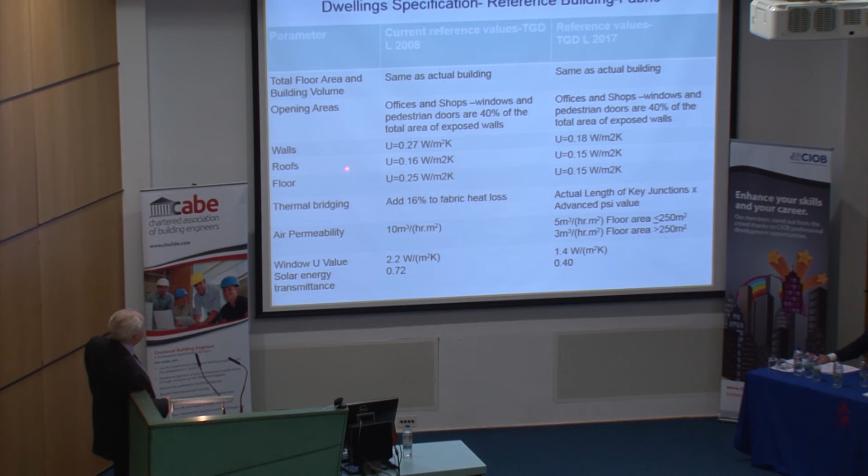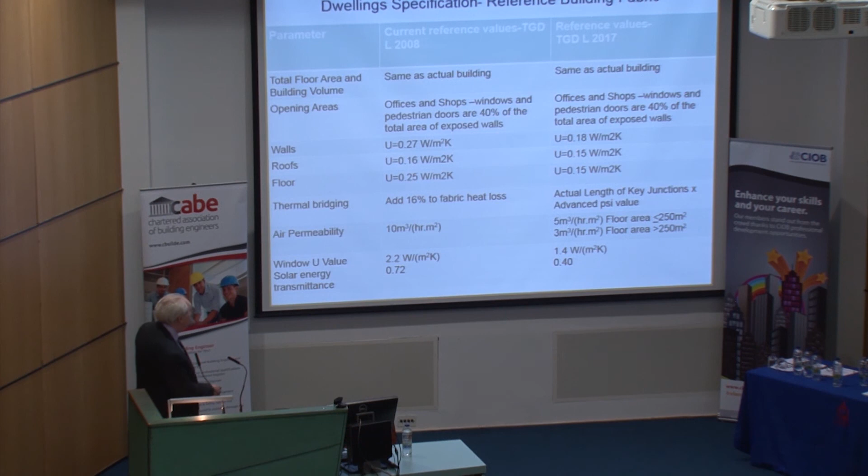Window U value is 2.2, going to 1.4. That's no big deal, though it might give you a problem where you have big windows or stuff like that. Solar energy transmittance of 0.4. Basically most of it is 65 lumens and 1.8 watts per litre second.

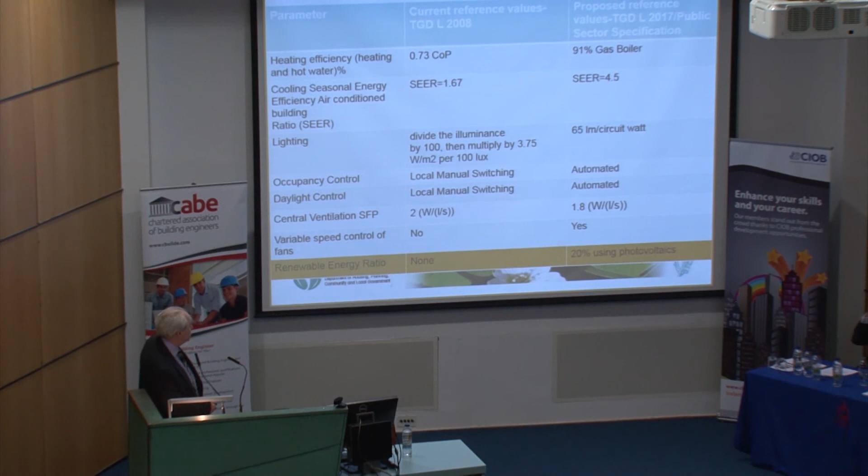You'll need variable speed fans rather than what you have now - you could previously have just a one speed one. So the controls have tightened up, and there's a requirement for renewables now. So that's where we're at with buildings other than dwellings, near zero.

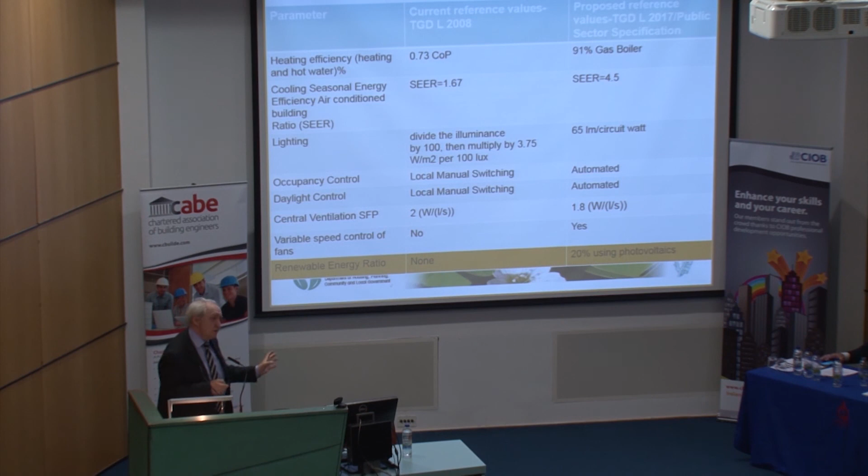That's in, by the way lads. That will apply from the 1st of January next year.

For the transitional arrangements - I'll probably be heading out the door now with planning permissions just to try and get them in - basically the way the transitional arrangements work is that the building regulation comes in on the 1st of January, but if you have the work started by the 31st of December, then obviously it's the existing building regulations that apply. That's the way all building regulations apply, by the way. If you have the work started before the regulation comes in, it's the works that apply at the time.

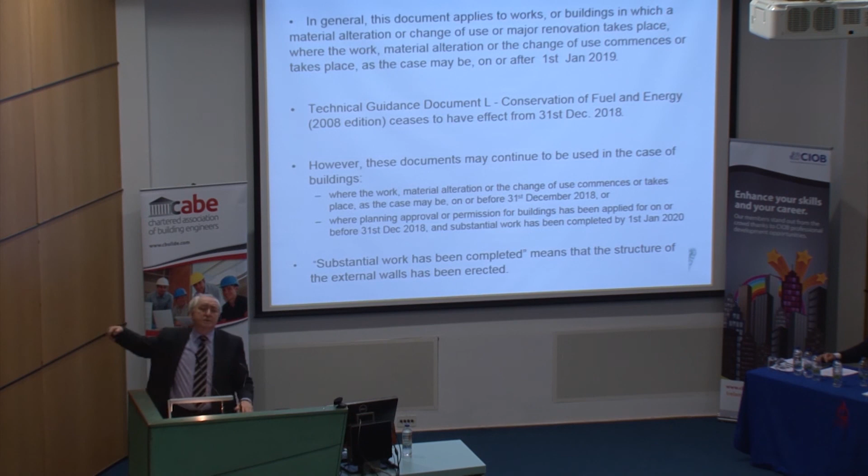I give the example that houses started in 2006 are subject to the building regulations that applied in 2006, even though you're finishing them today. It's not the building regulations of today that apply - it's the ones that applied when you started the work.

However, if you didn't start the work but you have planning permission in place before the 31st of December, then you can work to the old regs, but you must have it substantially complete by the 1st of January 2020, which only gives you a year. So if you haven't started the work by the end of this year but have planning permission in place, you can go ahead under the old regime, but must have it substantially complete. And substantially complete, as defined by the High Court back in 2003, was at wall plate level.

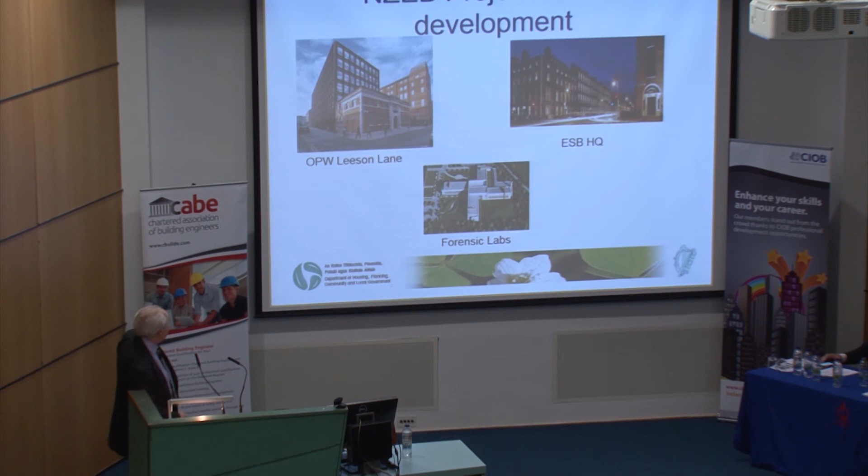Okay, some of the projects going on: OPW building in Leeson Lane, ESB headquarters, and the forensic labs. Major renovations - again, we're back to this.

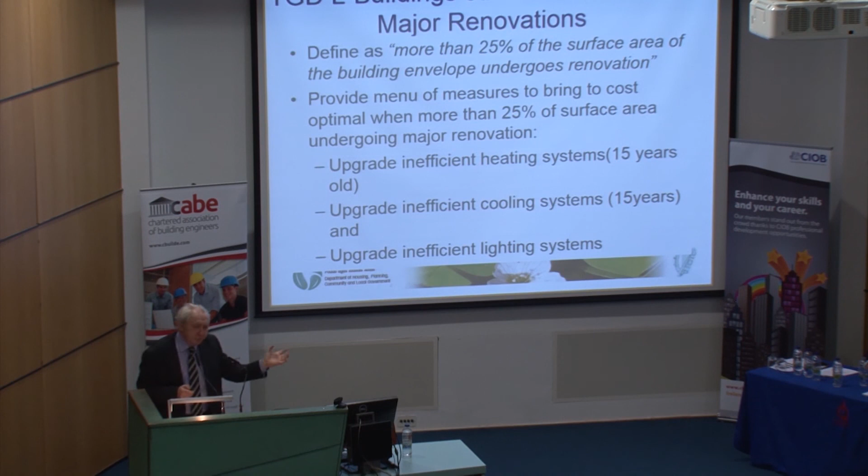In these ones, it potentially means it's easier - 25% of the surface. If you're doing more than that, you may end up having to upgrade inefficient heating systems, but that's if they're 15 years old and only have a certain performance. There's two criteria involved there. The same way, upgrade inefficient cooling systems - again, if they're 15 years old or meet certain criteria within the TGD L, which I haven't put in here, for efficiency. And then upgrade inefficient lighting systems. So that's where that is.

You can go onto the website, Building Standards, click on that - you'll find a world of stuff in there, okay? Thank you very much.